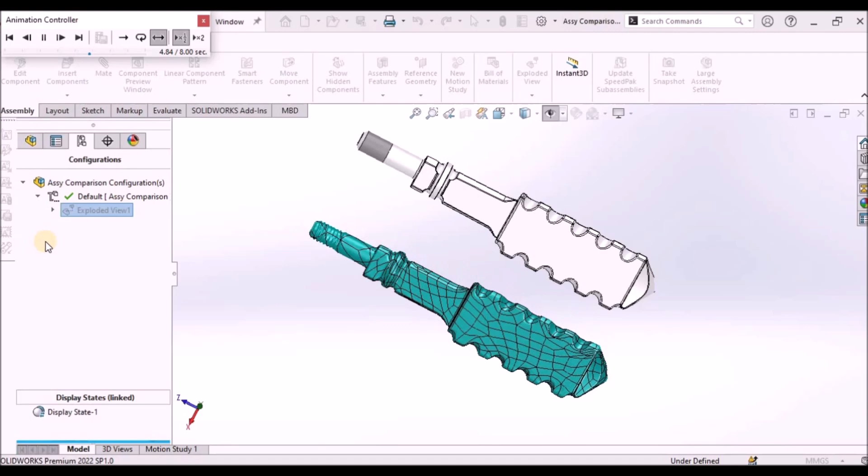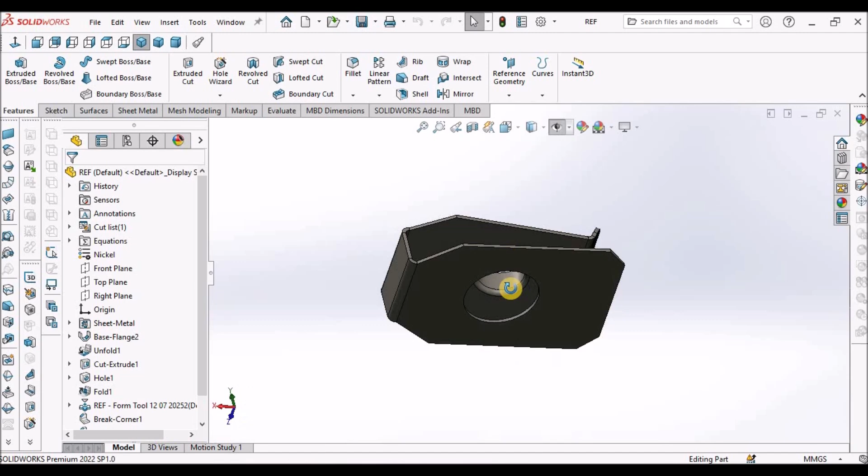Hi, today I am going to explain about lug nut or spring nut. On the left side you can see the component, and I am going to create a small forming tool for this component. So this is the component I am going to create, and this is the forming tool. Let's start now.

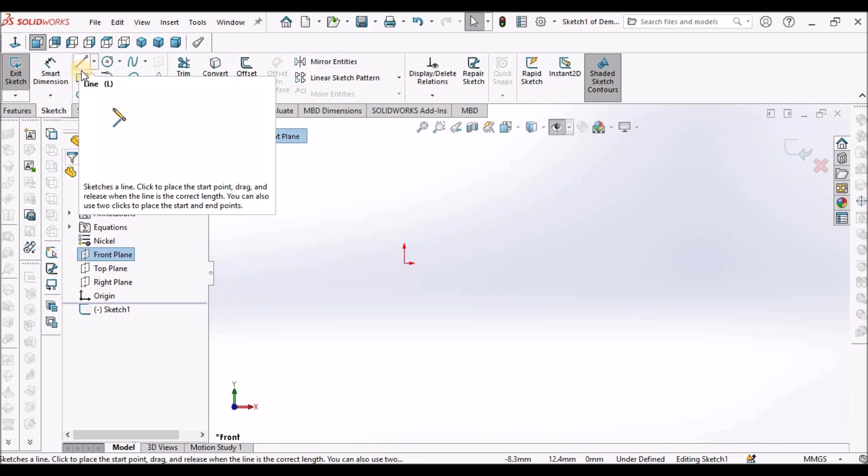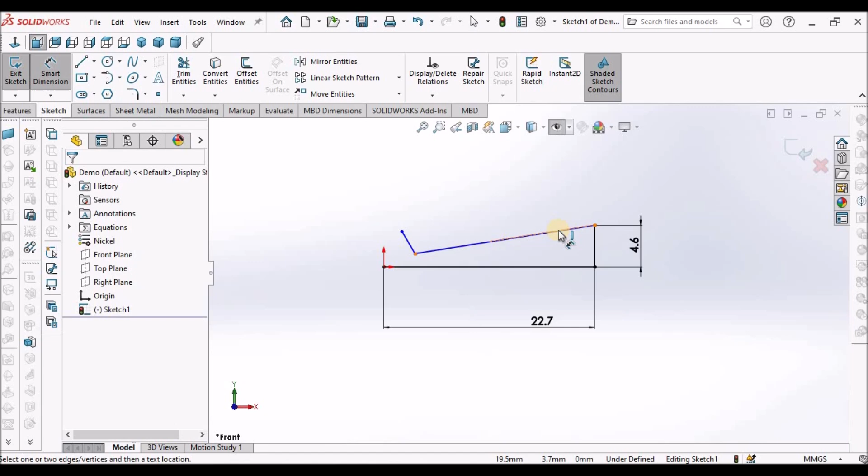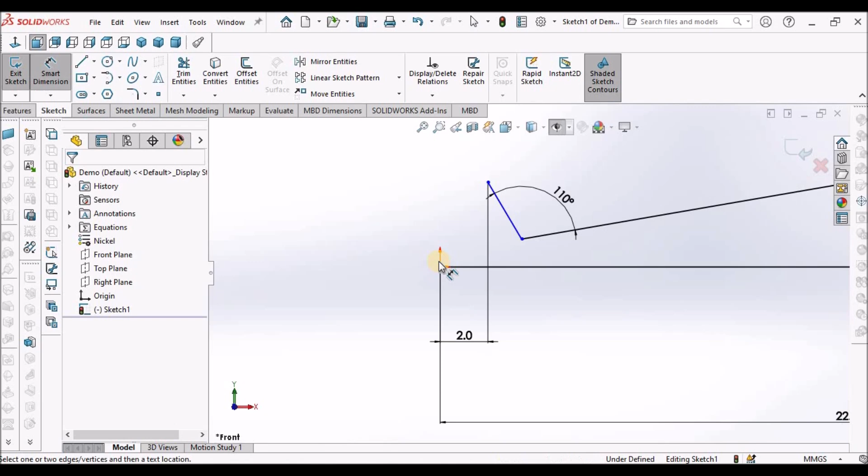I've taken a new SolidWorks part file. Select the front plane, go to sketch. We have to draw one sketch: this is 22.7, this is 4.6, this angle is 80, this is 2 mm, this is 110, and this is 4. So the sketch is fully constrained now.

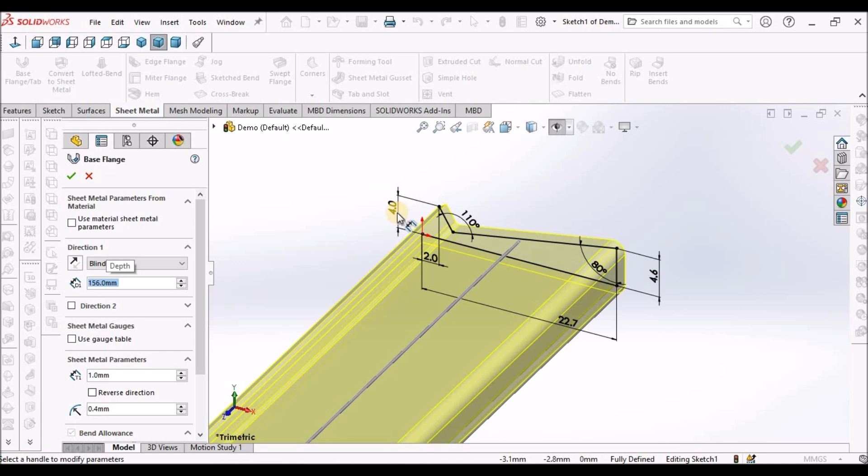Select the sheet metal tab, go to base flange. This is 15 mm. Select the mid plane. Thickness is 0.4, bend radius is equivalent to thickness, and K factor I have taken as 0.45. It should be less than 0.5.

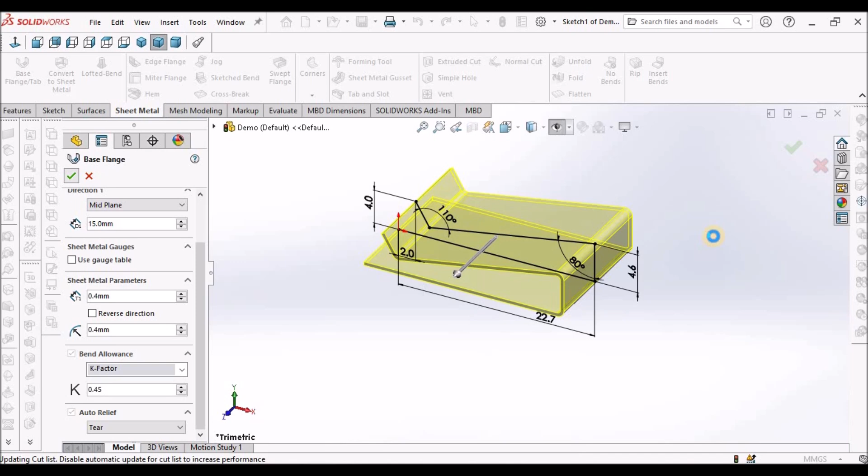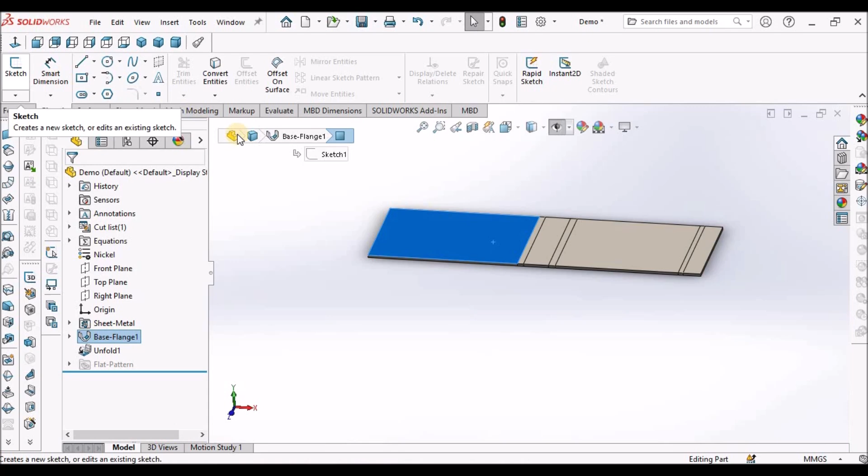See here. Now select the unfold command, select this face, collect all bends, and say OK. Select this face, go to sketch, draw one horizontal line.

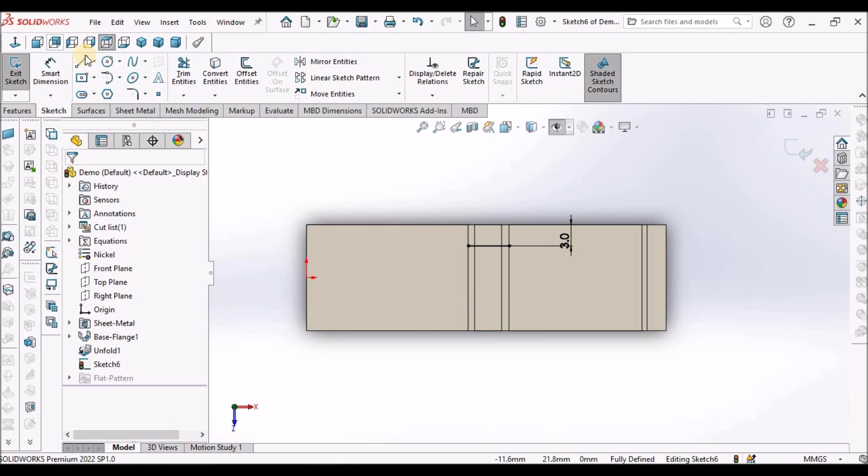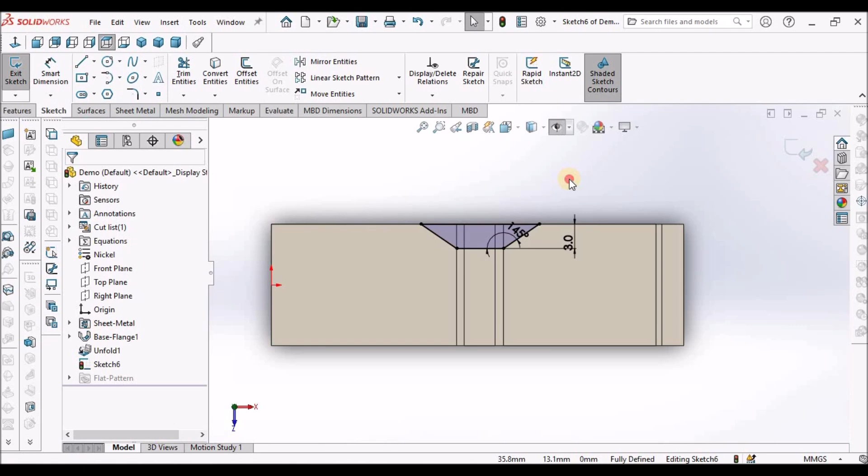This is 3 mm. Select these two lines and make them equal. The angle between these two lines is 145. For identifying the closed loop, we can click this shaded sketch contour option. Generally we don't use it, but if you click this option it becomes shaded, meaning the loop is completely closed, and it creates the cut without any error. That is the advantage of this option.

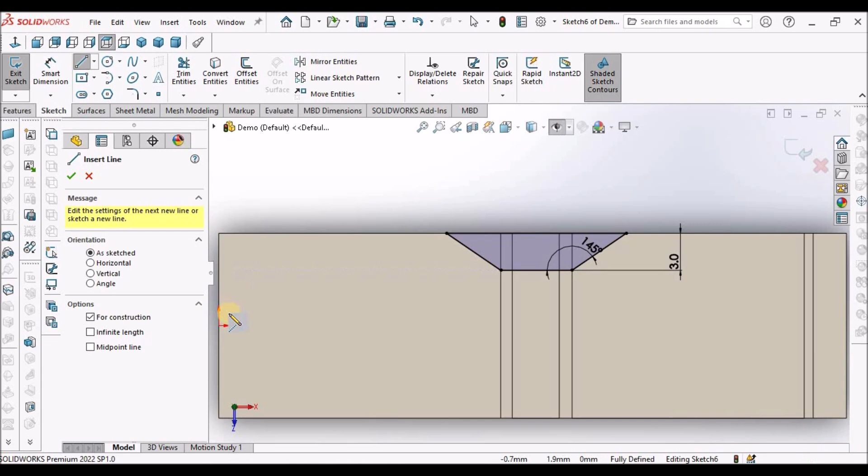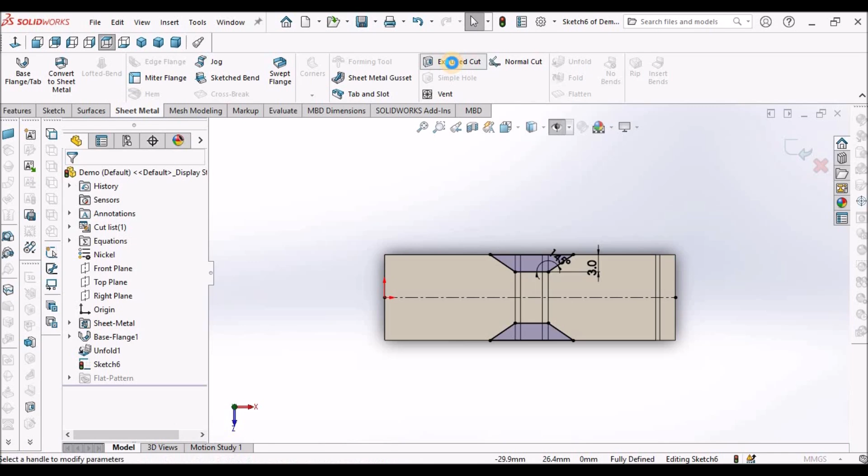Draw one center line, go to mirror entities, select all these lines, select mirror about this center line, and say OK. Go to the sheet metal tab, select extruded cut. Here we have to link to thickness and normal to cut, then say OK.

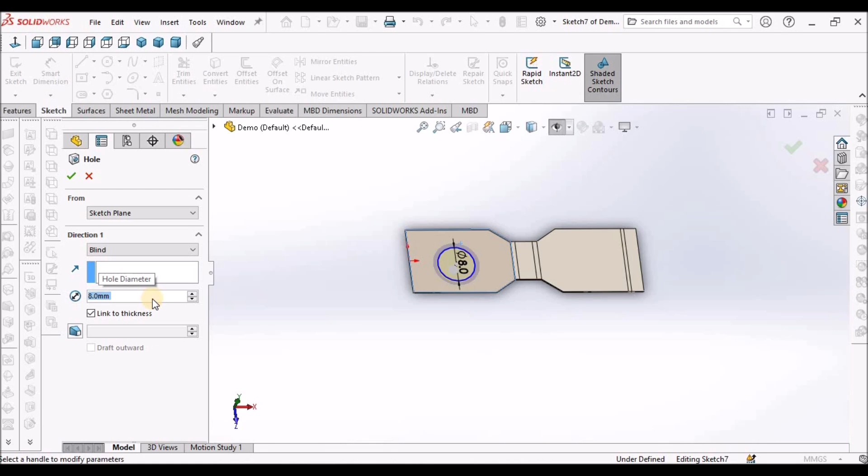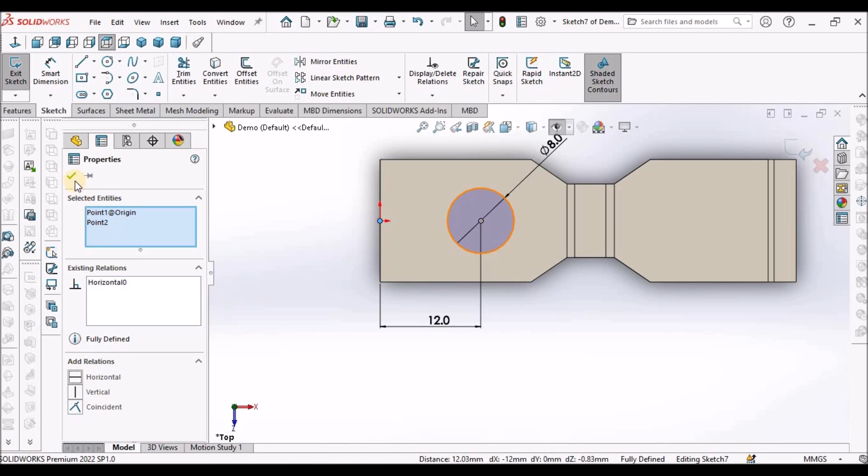Now select this face and select simple hole. In sheet metal we have to use the simple hole feature, which is very useful in the drawing. This is 8 mm, say OK. The distance between this edge and the center of this hole is 12 mm. Select this point and this, make it horizontal, and say OK.

Now fold this component, select all bends, and say OK. See here.

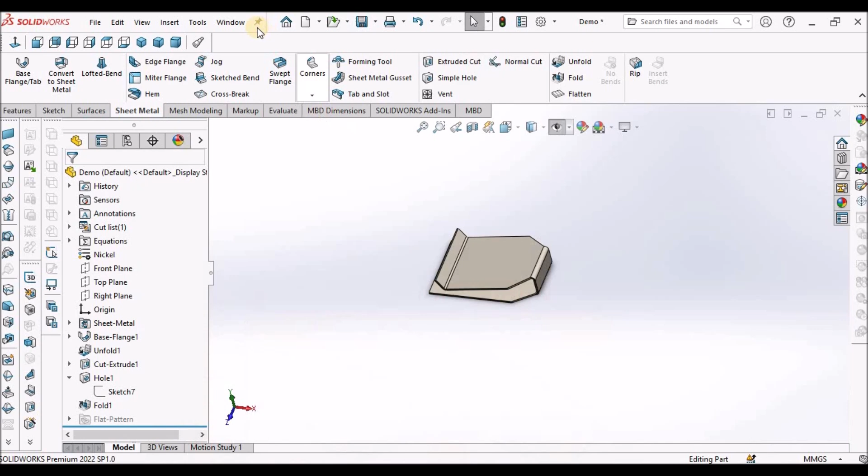Now I am going to create the forming tool to place it on this component. So I am taking a new file, select top plane, go to sketch, draw one center rectangle, and this is 10 mm.

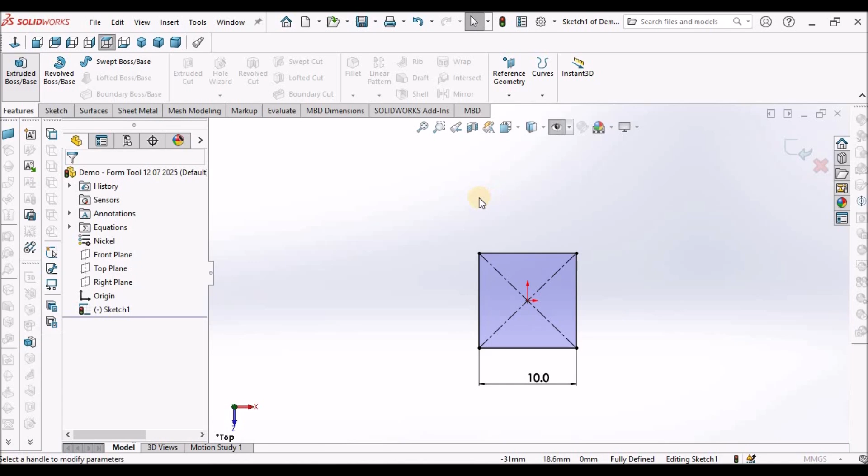Select these two lines and make them equal. Go to features, select extrude boss. Here we can take any value; I am taking 2 mm, and say OK.

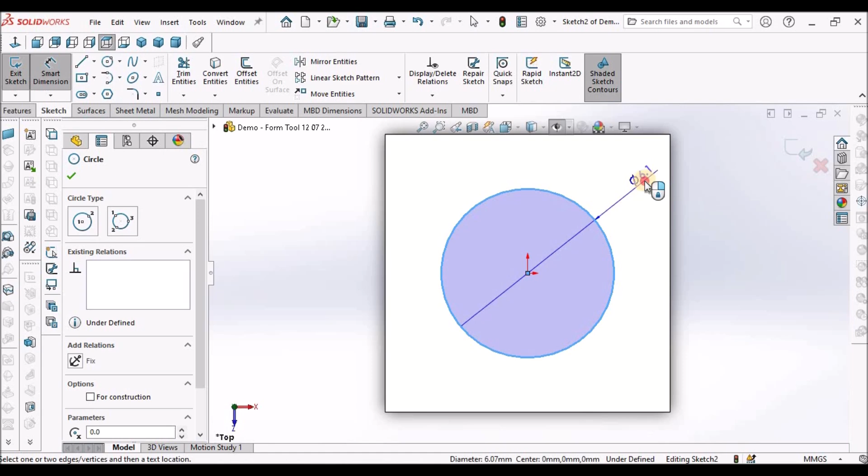Select this face, go to sketch, draw one circle, and this is 5 mm. See here, this is 5 mm. We can take any value; I am taking 3 mm, and say OK.

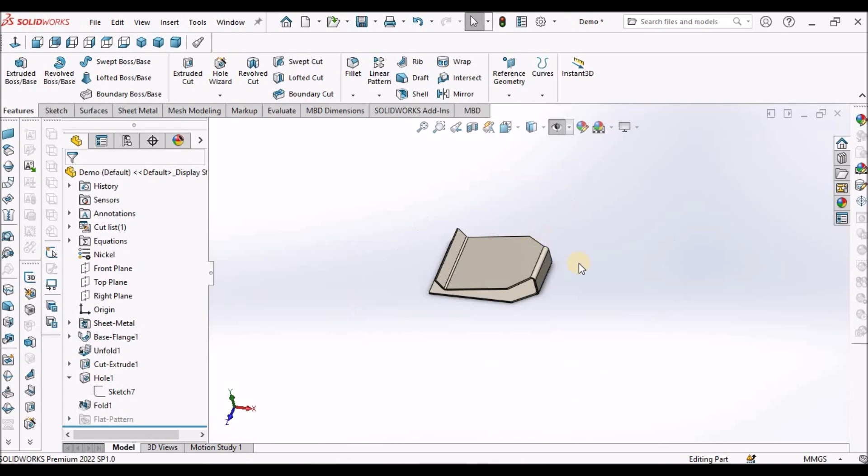Select fillet command, and fillet is 0.5, say OK. This fillet should always be more than or equivalent to the sheet thickness. Here it is 0.4, so we have to provide a larger value, otherwise it shows an error. That is very important.

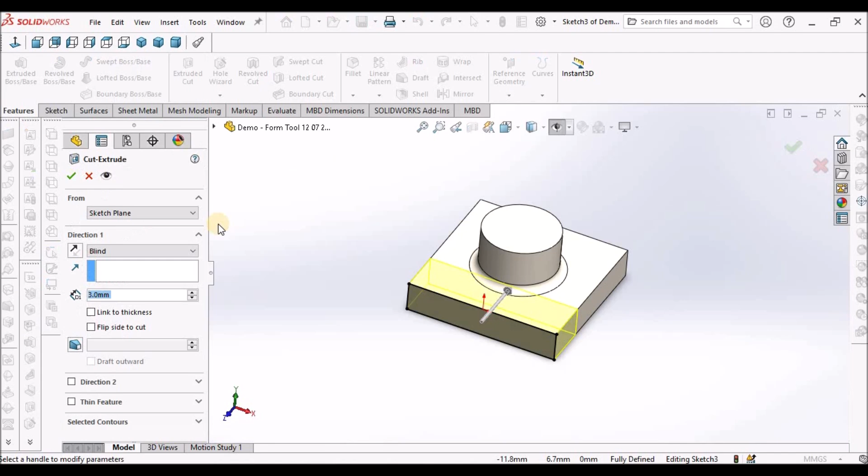Select this face, go to sketch, select convert entities. See, the rectangle is formed. Go to features, select extruded cut, select through all.

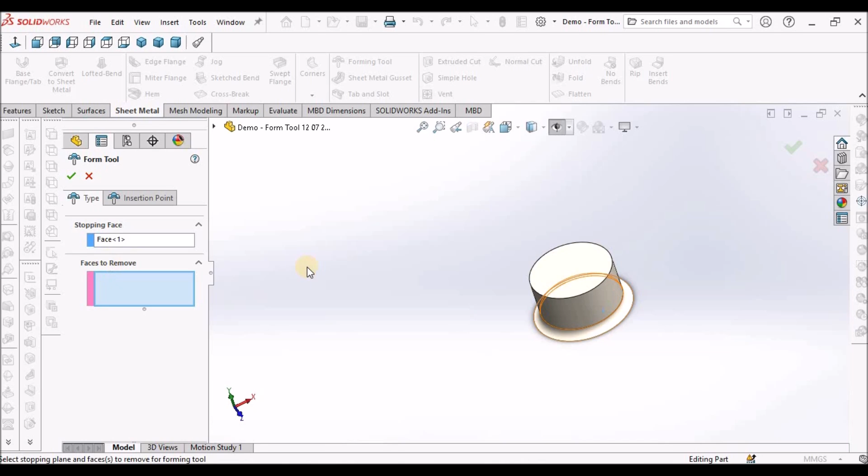Now we have to apply the forming tool command. Select this face; this is the stopping face. For faces to remove, we select this one, and the rest of the yellow portion is the forming face.

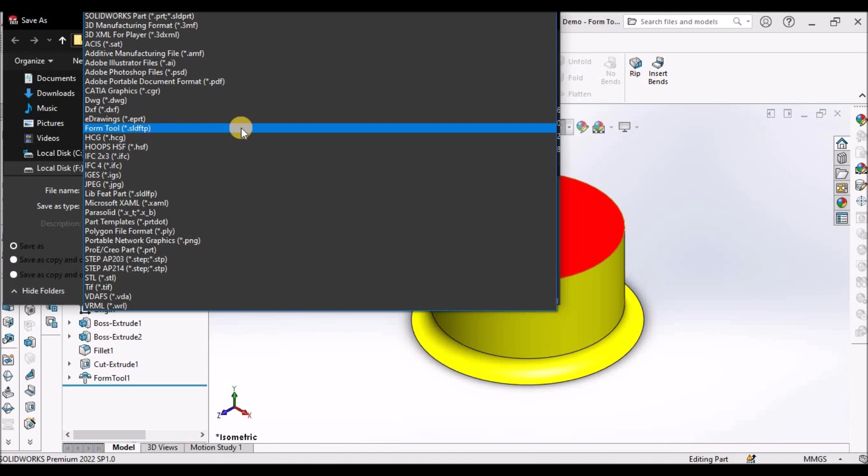Once it is done, we have to save this file with either extension: form tool (SLDFTP) or simply the SolidWorks extension SLDPRT. So two extensions we can use, and we can save this file in the forming tool folder. I am going to open it here, or we can customize and save it in a customized folder. After saving, we have to close this forming tool file.

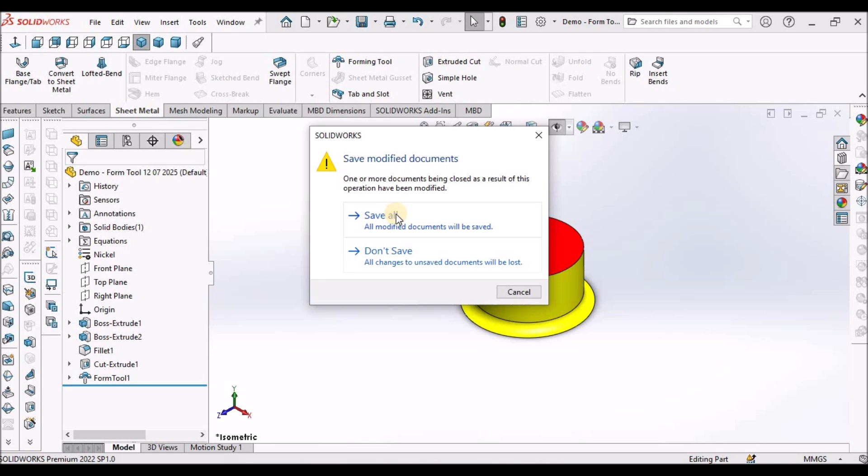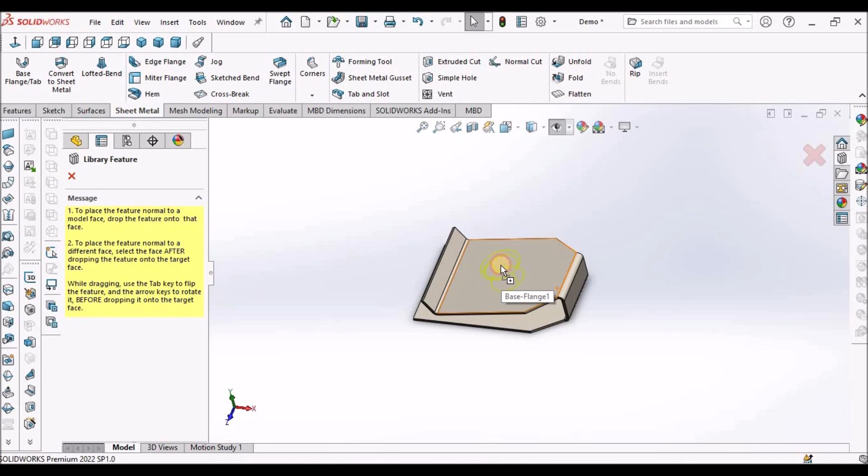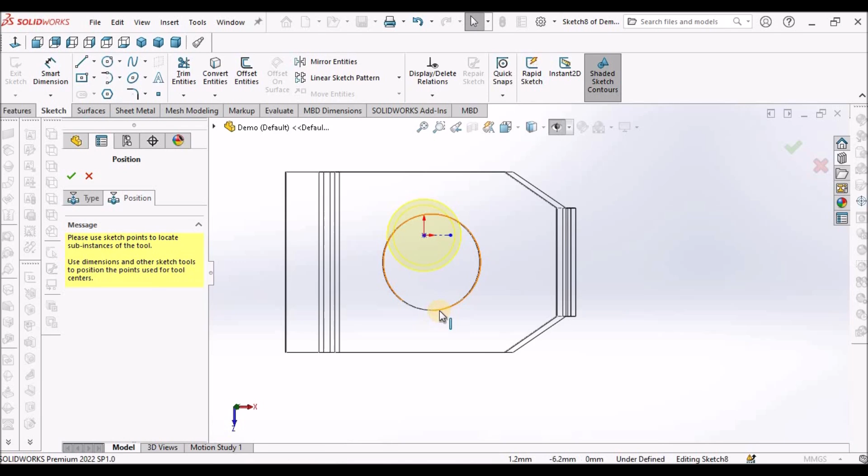Now we have to go to the design library. I have already saved this file, so I am going to place it on this component. We have to select the top face. For positioning, we keep it in wireframe, select this edge, convert entity, and make it a construction line. This is for reference to place it exactly at the center of this hole. See, it is placed exactly.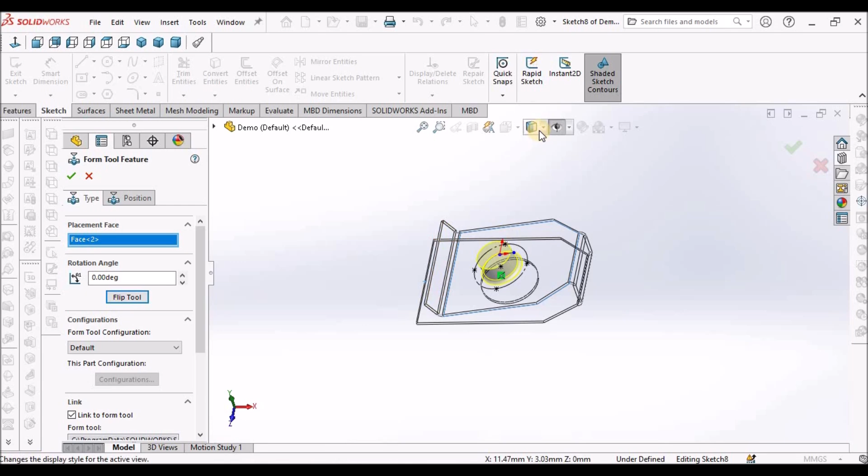After placing this, we have to flip the tool. We need this one in the opposite direction. This direction is important, so I flip it. See, now it is in the opposite direction. Say OK.

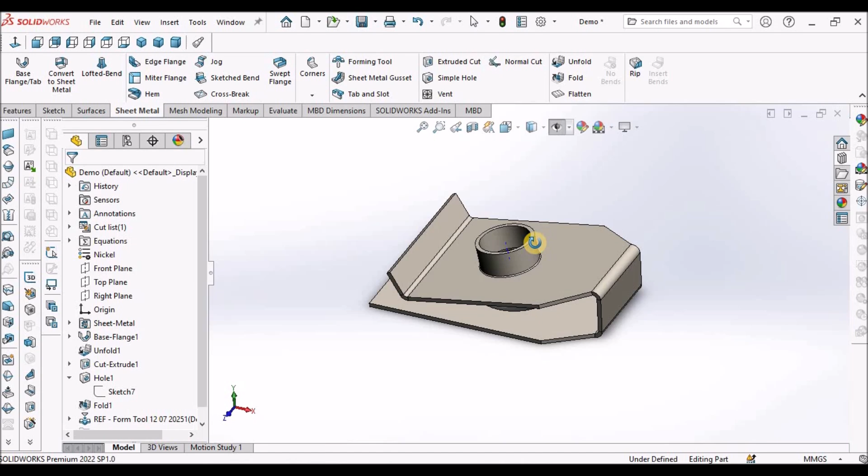Now I am keeping it in shaded form. So this is the feature, the extruded feature. Now I am going to apply fillet, so we have to select break corner or trim corner. This command we have to use in sheet metal. For fillet we select this option, and fillet radius is 2 mm, say OK.

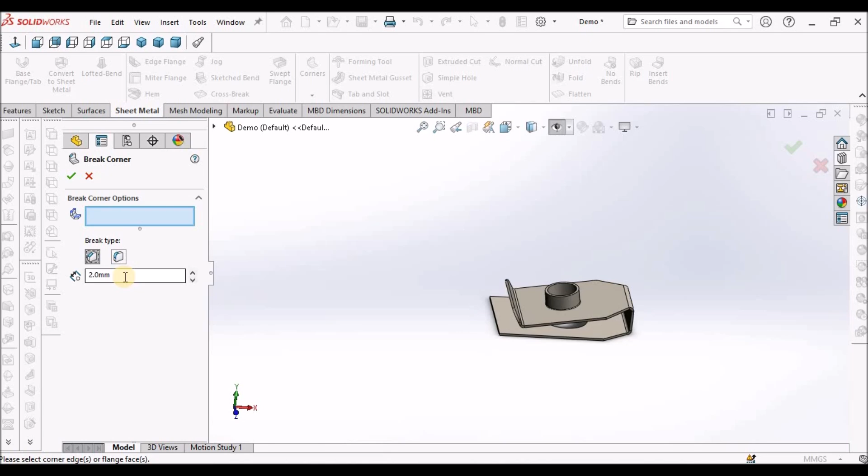And I am going to apply a chamfer of 2 mm at this location to remove the sharp edges. See here.

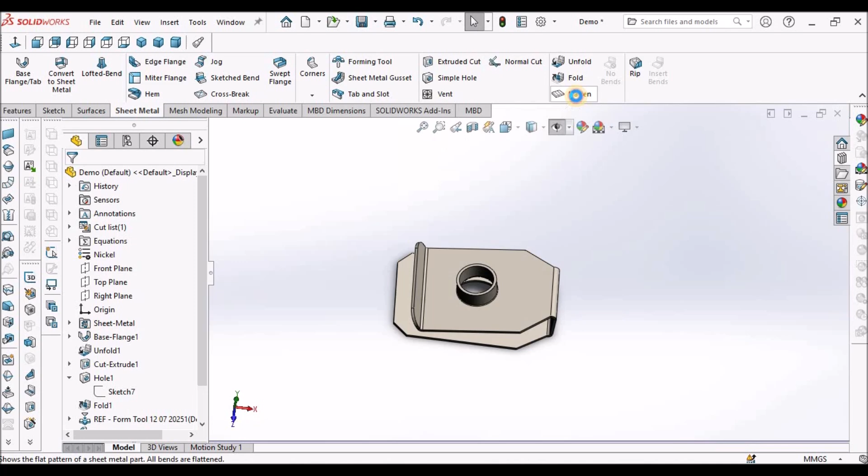So this is the final component, and I am going to show you the flat pattern. This is how it looks like.

So this is a brief about the lug nut or spring nut in SolidWorks sheet metal module.